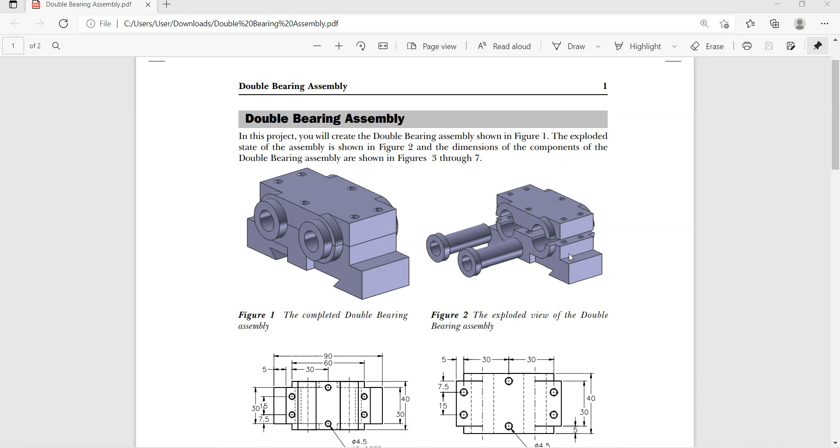Friends, today we are going to see how to make the base from this double bearing assembly. This is the base. Now we have to make this base. For that we are going to make first this sketch.

Now let's start it. Make sketch as shown in figure. Select this line, then make sketch. Use this command to make one circle.

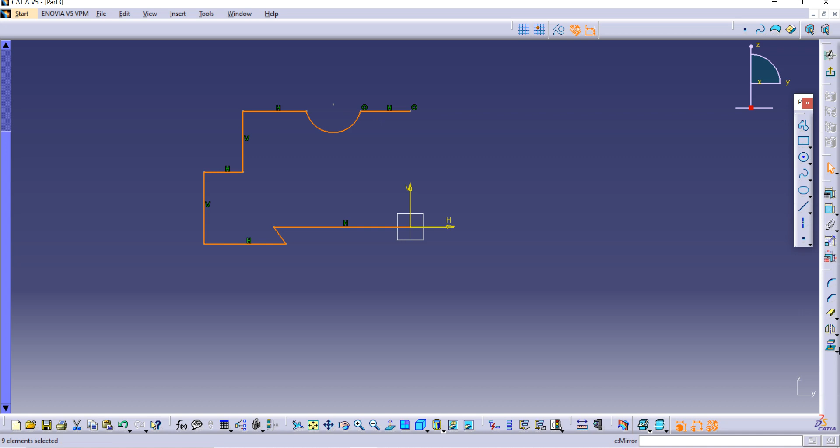And then escape. The sketch is already selected, so use this mirror command and make it mirror. Now let's give dimensions to it.

Click on this constraint command. See, all dimensions are given here. From that we are going to give dimensions. So dimension between this and this circle is given as 35.

Distance between this point to this line is 22.5. Not 22.5, 17.5. After that, 17.5.

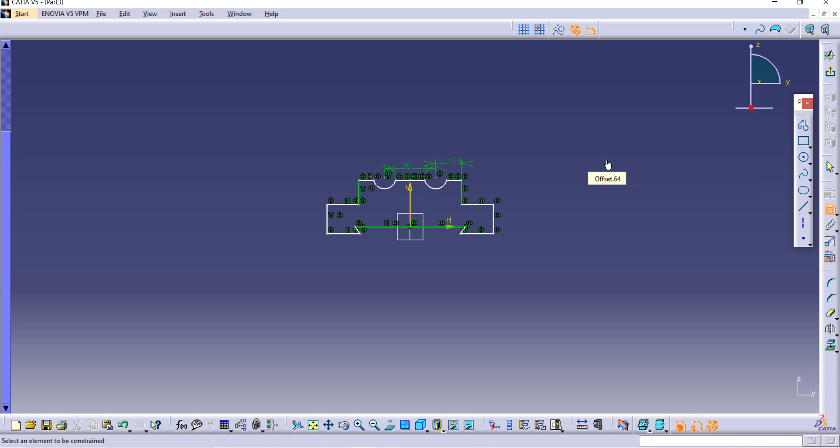After that, distance between this line to this line is 10, and distance between this to this is 5. Similarly, distance between this to this is 15.

After that, distance between this point to this point is given as 45. Then now distance between this point to this line is given as 22.5.

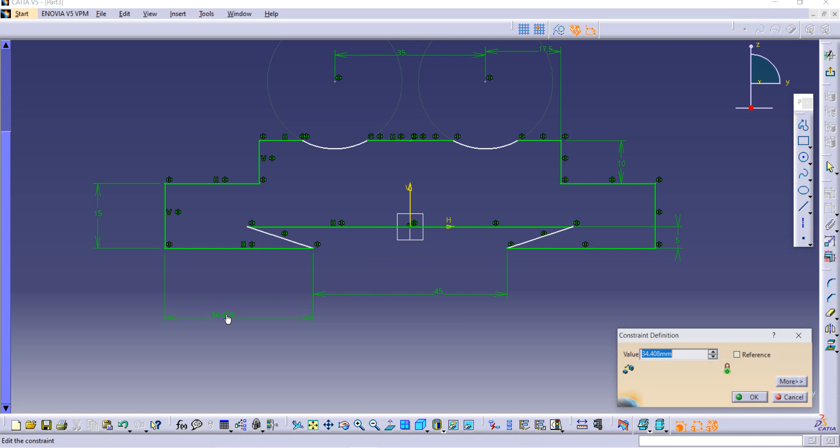After that, distance between this point to this point is given as 5, but it was horizontal. You can see here the horizontal distance is given as 5. So just select those 2 points, then right click on your mouse button and then horizontal measure distance, so it

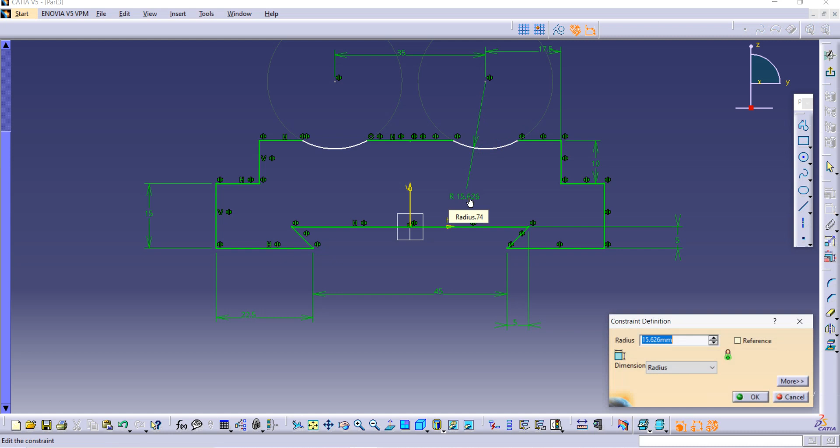must be 5. After that, let's give dimension to this circle. It was 7.5. And

now let's give constraint. Select this point and this line and give constraint as coincide. Then click on OK. Now our whole sketch is in green color, so it is fully constrained.

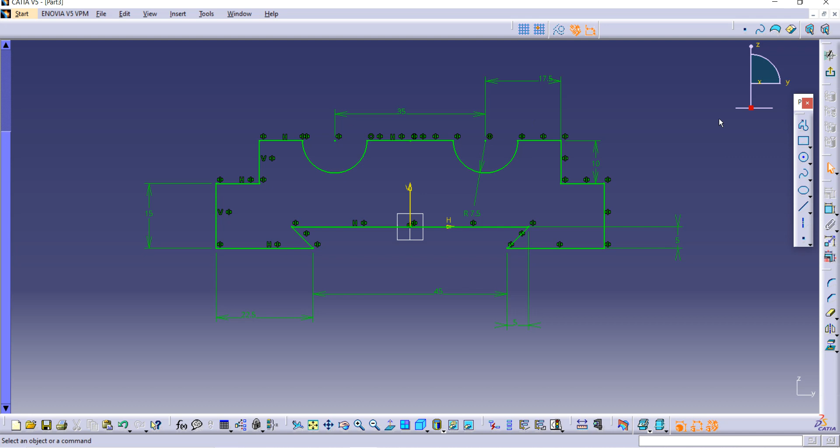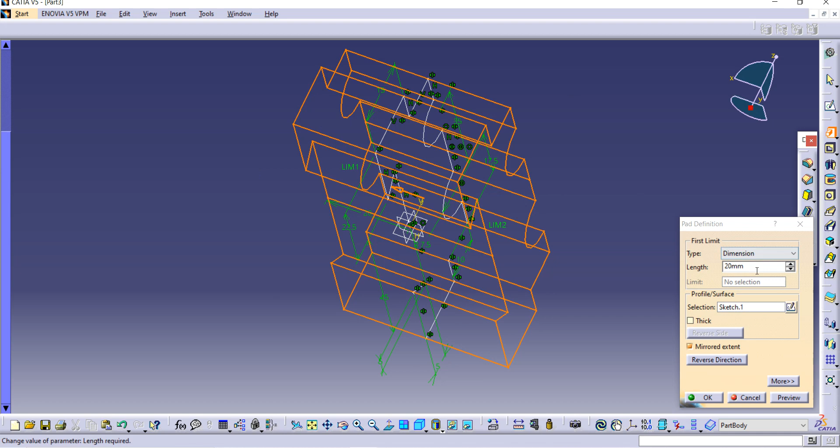Go on exit to workbench. Select this pad command. Now we are going to use this mirrored extent, so we will get our axis at the center of whole product. Then we are going to use here 30 divided by 2 because we want equally separated body to both

of the side. So you can see here the plane is at the mirror, the plane is at the center, and body is divided into 2 parts equally.

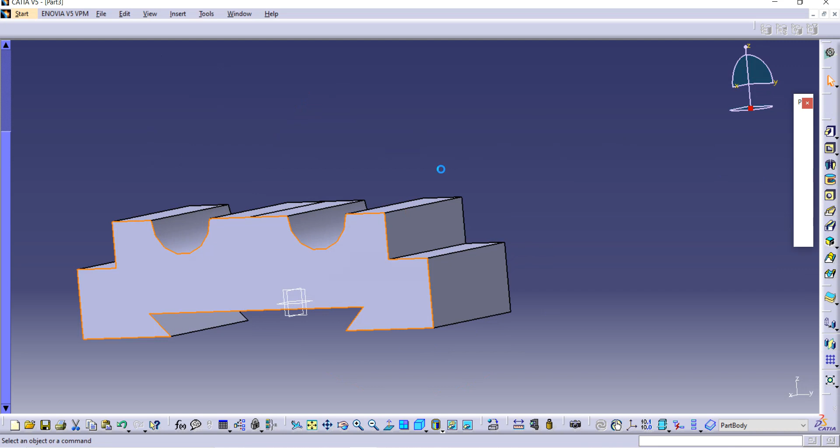Now we are going to sketch on this surface, so select it and then sketch option. After that, we are going to make this part. So first go on projection, so it will be very easy to make sketch.

Now select that circle command, then make one circle who will intersect to this circle. Now give constraint. Dimension of this circle is 25 as a diameter.

After that, select this line command, make one straight line from here and then extend it till this yellow line. Now the distance between this line to this line is given as 15 divided by 2.

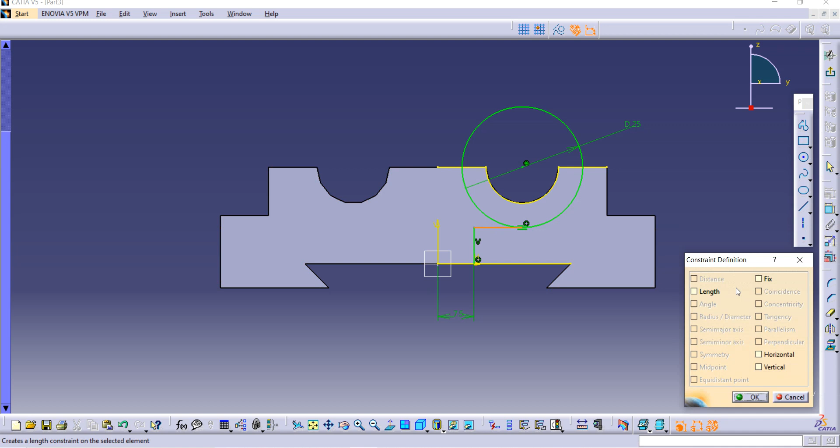So use this constraint option, select this axis with this line, and it is 15 divided by 2. After that, this line is in white color, so I am going to use constraint command. First select this line, then go on constraint, and then it must be horizontal, then OK.

Now we are using this trim command to trim extra parts. Now select this sketch by using control command, control button. Sorry.

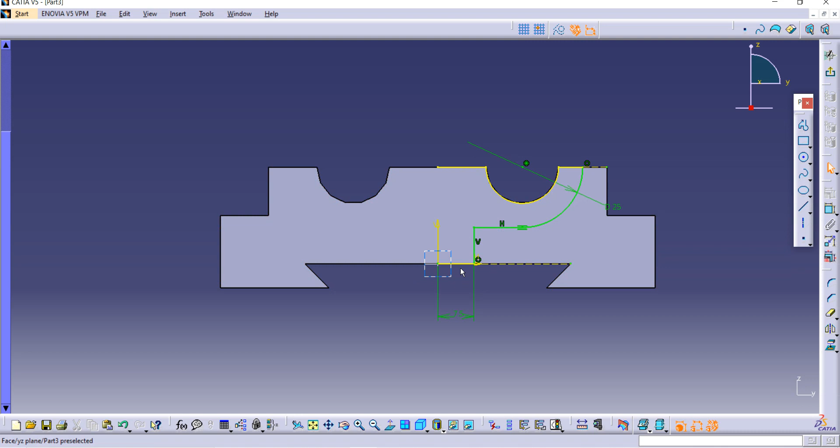After that, click on mirror and select axis. After that, exit to workbench and use this pad command. Given length is 5 for one side and enter it.

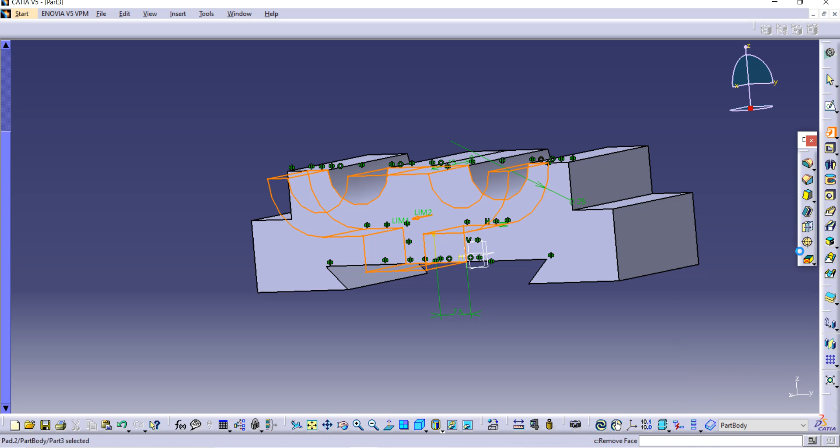After that, go on mirror again. Then here is mirroring element. We have to mirror along this plane, so I am selecting it, and then OK. We have the sketch is created for both the side by using mirror command.

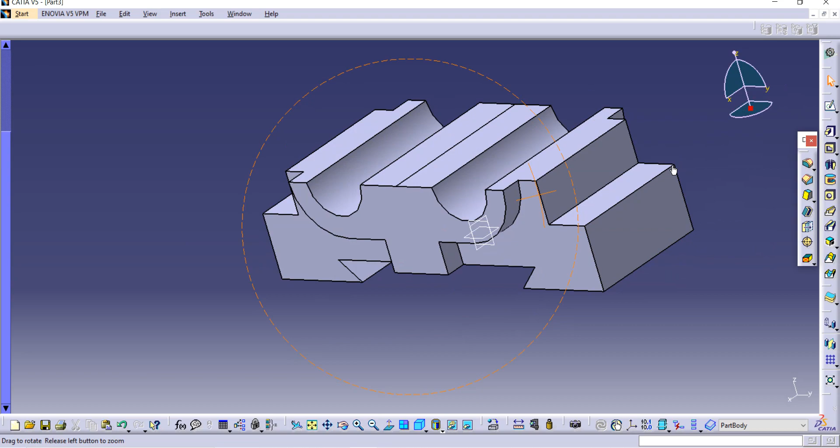Now holes are given here, so we are going to make holes. Let's make holes. So select this surface and then go on sketch option, then make first one circle of diameter 4.5. It's already given in figure.

Then again go on constraint option. Distance between this line to this line is given at 7.5, and distance between this point to this point is given as 5. This to this is given as 5.

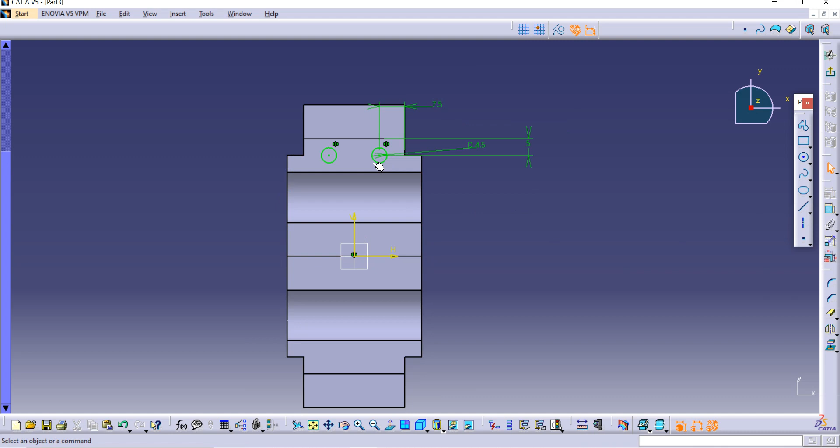Now we are going to use again mirror command. First select this, then use this mirror, select axis. Again use mirror command. Select circle, then use mirror, and again similarly circle, mirror, and axis.

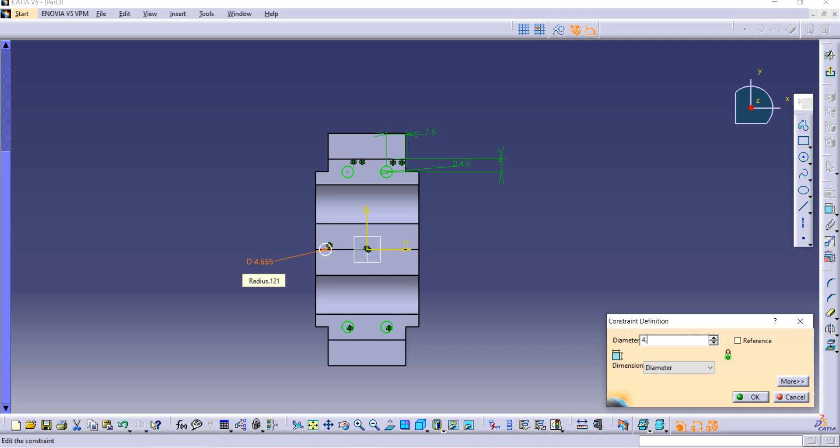Now we are going to make one circle here of same diameter of 4.5. After that, the center point and this line are collinear, so use this constraint, coincide, then coincide it and it OK.

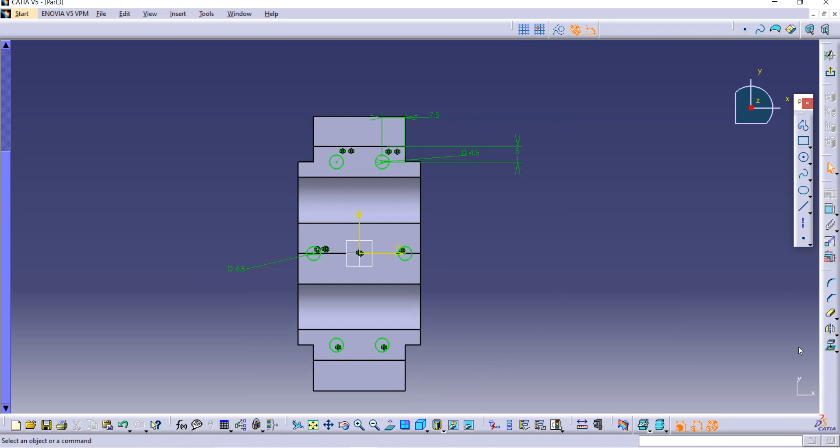After that, again mirror, and we have done with our sketch. After that, go on exit workbench.

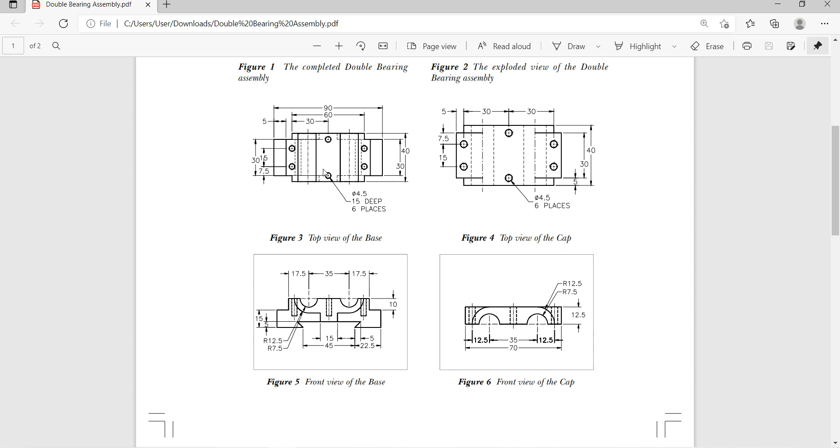See the depth here already given here, it's already given here that hole must be 15 deep, means we have to create deepness of this hole till 15 mm. So go on this pocket and then write here as 15 and enter it.

So you can see our sketch is ready. Thank you.